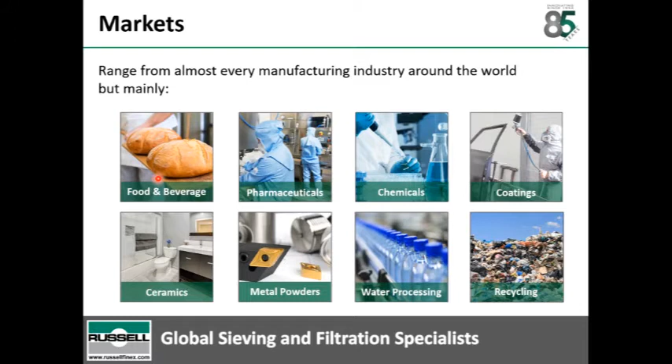We are working with a lot of OEMs, system integrators like GLAD, GIA, and a couple of isolator manufacturers as well.

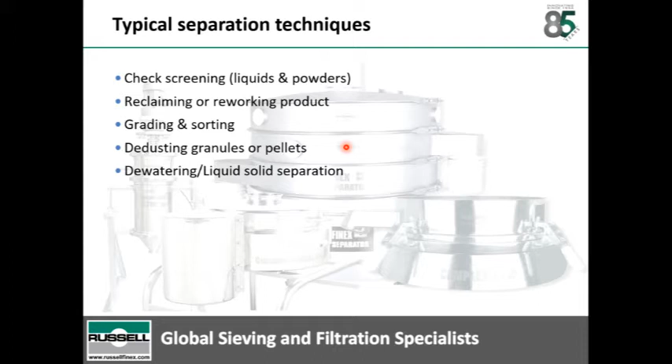Now let's talk about the types of separation technique. Five major types of separation techniques are: check screening of liquid and powder, reclaiming or reworking product, grading and sorting, dedusting granules or pellets, and dewatering or liquid-solid separation.

In continuation to the previous slide, let me take you through different technology or equipment for sieving and filtration. Starting with the bottom one, rotary sifters, which are generally used for high capacity but have low accuracy and poor contamination control. Next is the gyratory separator or tumbler. They are gentle in action and require a large screen area.

Vibratory separators, contrary to gyratory separators, have both horizontal and vertical vibrations and are the most efficient grading machines. Next come check screeners, especially for final sieving. They have minimal contact parts and product dwell time.

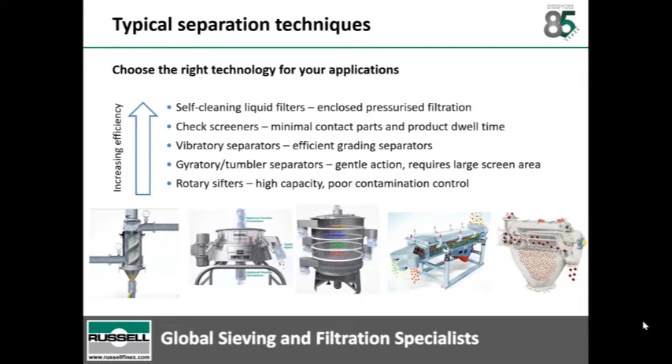Inline liquid filtration: the self-cleaning Russell EcoFilter is an innovative filtration unit ensuring that contamination can be easily removed from your liquid product. Its unique SpiroClean cleaning system and replaceable stainless steel filter element allow for continuous, reliable filtration down to 10 microns. This eliminates the need for production stoppages required to change filter media such as filter bags and cartridges.

Key benefits of the Russell EcoFilter are that they offer totally enclosed filtration, need a small footprint for high productivity, very low or no maintenance, silent operation, and accurate temperature control.

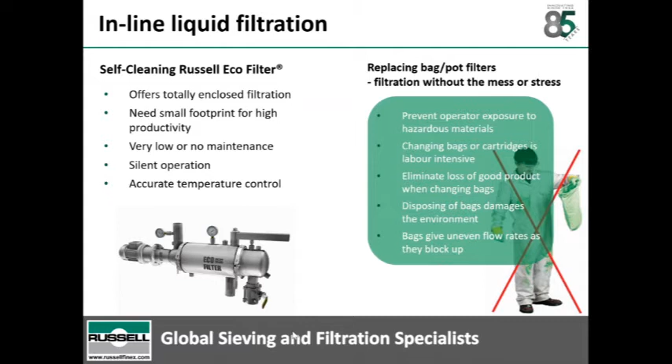Typical applications. There are many places within the manufacturing process where the vibro sifter can add value. It can help you audit incoming material from suppliers, and it helps you meet your product specifications. We have customized solutions for every industry, be it pharma, food, or chemical.

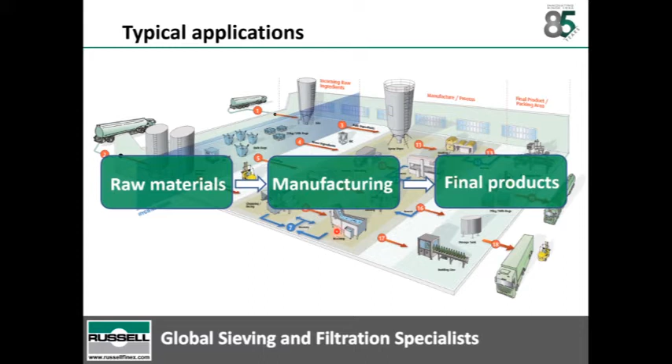Typical applications in the pharmaceutical industry include checking sieving of incoming dry material, checking sizing after blending or granulation or milling, checking sieving of granules prior to tableting, batch check sieving of APIs in isolation booth, and grading final products, that is, top and tailing.

Russell Finex is the only company which has application specific models for each application.

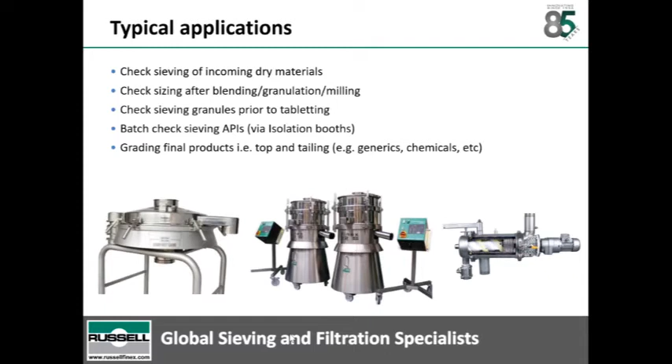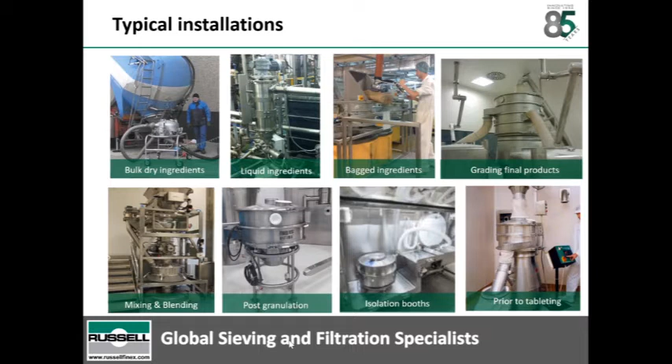While selecting a vibro sifter model, it is always advisable to consider a few parameters, like how the material is going to be fed: is it manual feeding, feeding through rotary valves, pneumatic conveying, or through a screw conveyor? We have a solution for all such typical feeding scenarios.

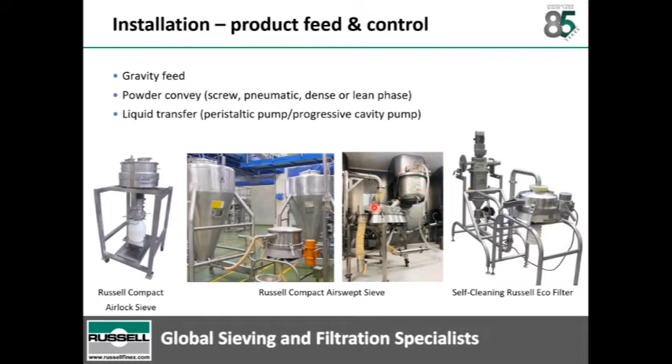In this slide, the first photograph shows a compact airlock with a bottle docking station. The second photograph is of sugar unloading from a bin with the help of a compact Airswept machine. In the third photograph, you can see a high shear mixer being charged through a compact 900 Airswept machine.

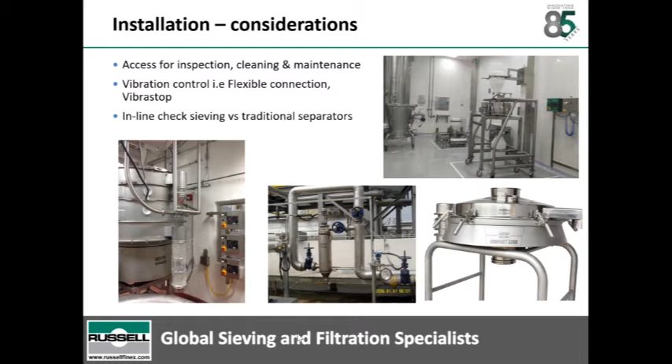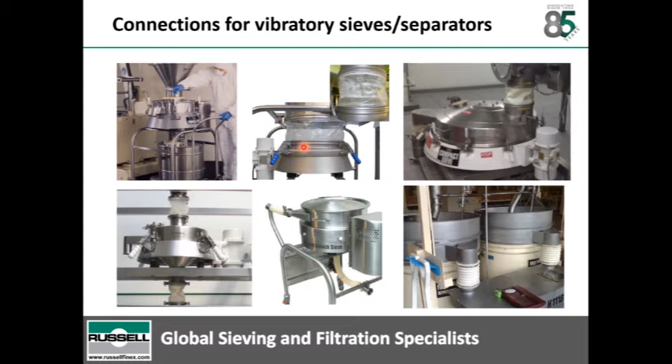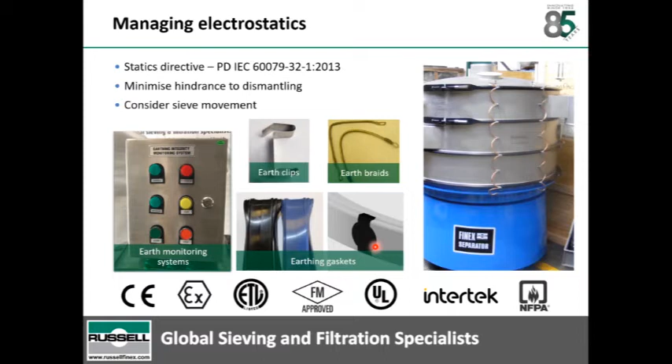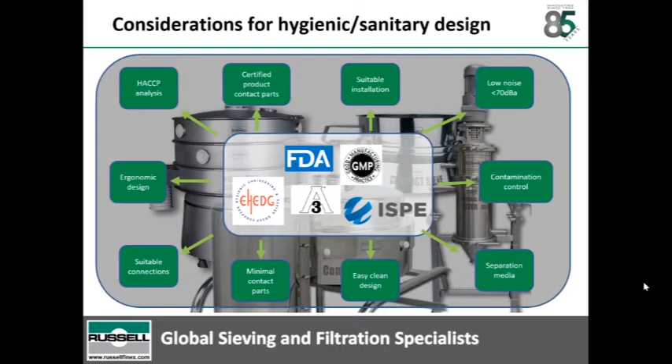Consideration for hygienic or sanitary design.

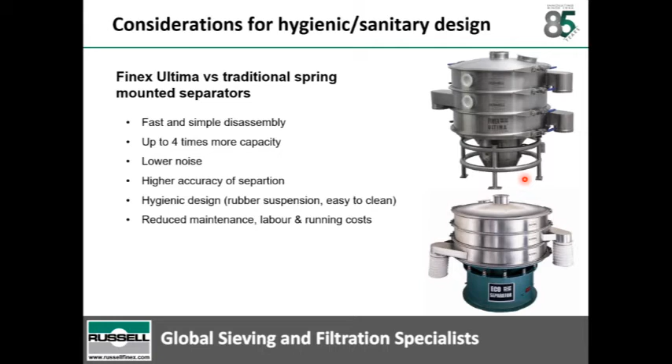Whereas conventional sifters are spring mounted, the Finex Ultima's rubber suspension mounts enable increased accuracy and material control and higher screening capacities compared to spring mounted machines. It also provides improved cleanability due to its modern hygienic open frame design, and we all know hygiene is of utmost importance in pharmaceutical companies.

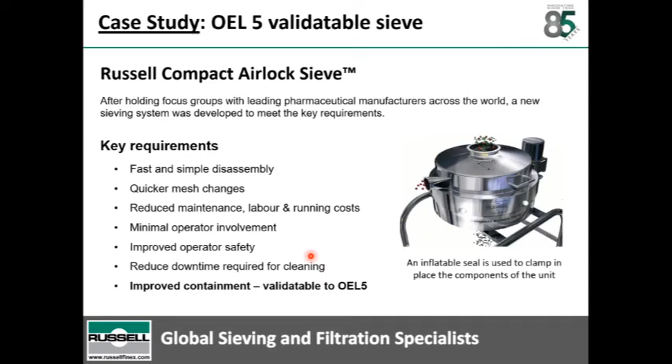Its key features are fast and simple disassembly, quicker mesh changes, reduced maintenance, labor and running cost, minimum operator involvement, improved operator safety, reduced downtime required for cleaning, and improved containment of near about 1 microgram per cubic meter.

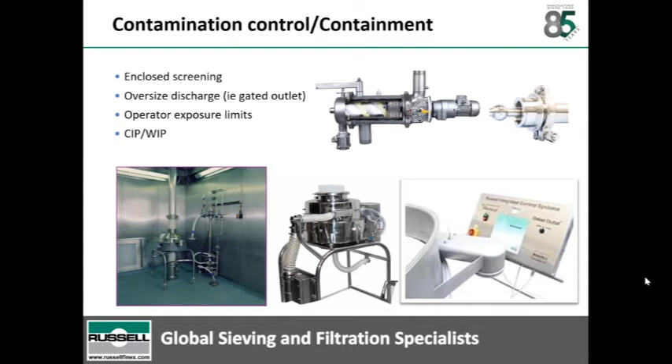Case study: API isolation booth with aseptic pneumatic sieve. In this slide, you can see the application in which APIs would be loaded into the isolator and vacuum conveyed and screened by another integrated sieve system.

Key benefits are suitable for ultra high containment area, maximum operator safety, easy to clean, very low noise, OEL level 5 containment, and very small footprint.

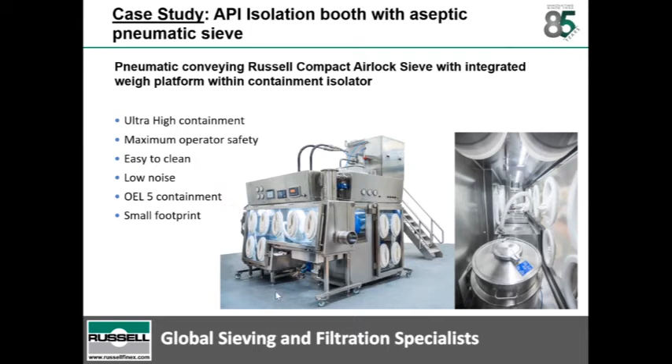In continuation to the previous topic, here are a few more photographs wherein we have installed sifters inside isolators. You can see in this photograph a mini sifter is installed in an isolator.

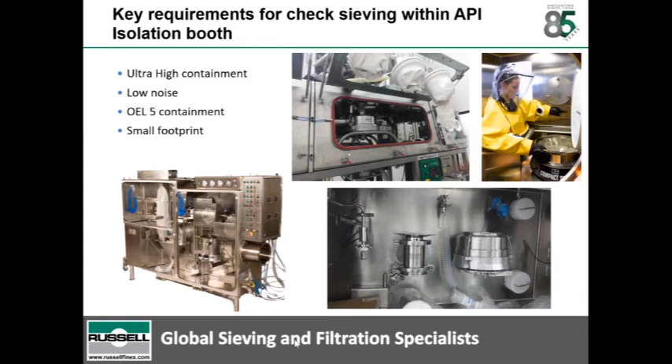Removing ferrous contamination. Another important solution that we provide for ferrous contamination that happens in food and pharmaceutical industry is a fully stainless steel easy clean separator. Unlike conventional magnetic separators where the magnet bars are secured at both ends, the easy clean magnetic separator has a unique open-ended design, allowing for ferrous contamination to be removed easily and effectively.

Russell Finex easy clean magnets are designed to allow optimum coverage of magnetic field strength. You can see in the picture, there are 4 magnetic bars which are placed in such a way that you get maximum coverage in the magnetic field.

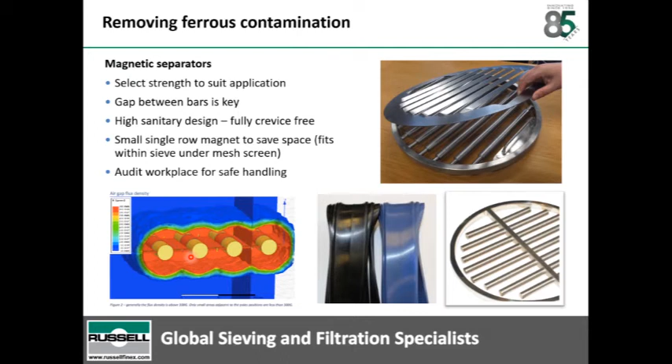Filtration media selection. In case of vibratory sieve, we provide mesh frames with a mesh count as well as in micron. Generally, we prefer to supply mesh frames in micron as they are more accurate. We have the options of different MOCs like SS304, 316, 318 and 430.

In case of liquid filters, we have 2 options for filter screen. The first one is defined hole, which has high accuracy but low open area. The next one is wedge wire, which has low accuracy but high open area.

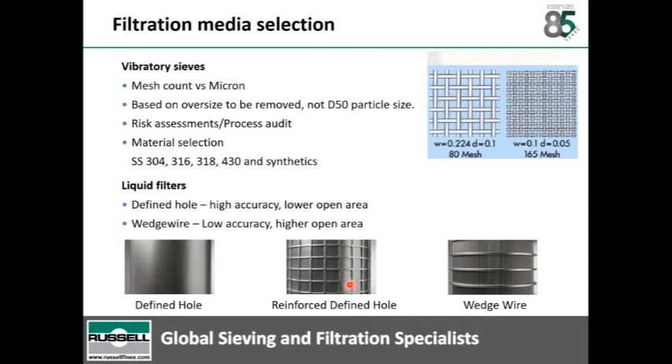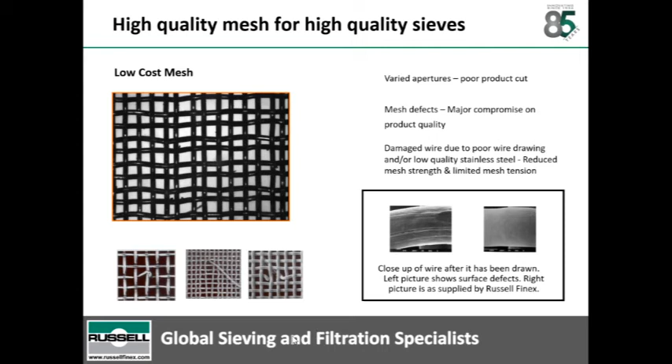Now you might want to ask how we ensure high quality mesh, the most critical part of our machine. At Russell, all mesh cloths are sourced from the top quality manufacturer in Europe.

As you can see on the screen, there are a lot of defects in the low cost mesh which can reduce your product quality. On the right hand side box, you can see the close-up picture of the surface defect found on local wire mesh, whereas Russell mesh have no such defects.

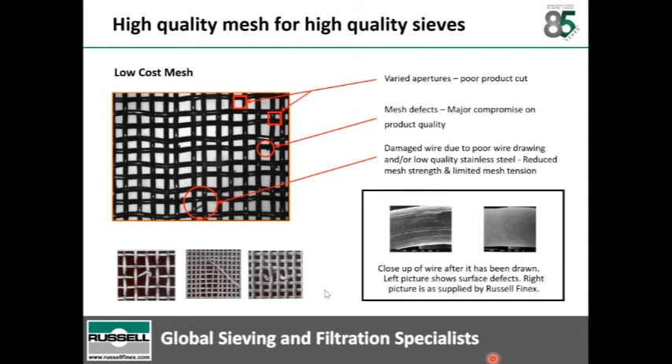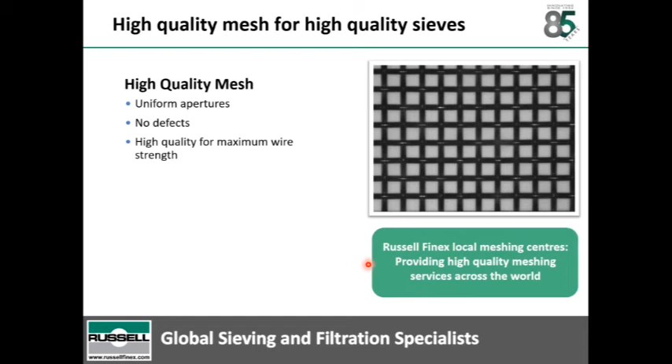Continuing on the same topic, Russell mesh frames are with uniform aperture with no defects. With Russell mesh frames, you will have high sieving accuracy, improved mesh life, and reduction in frequency of remeshing.

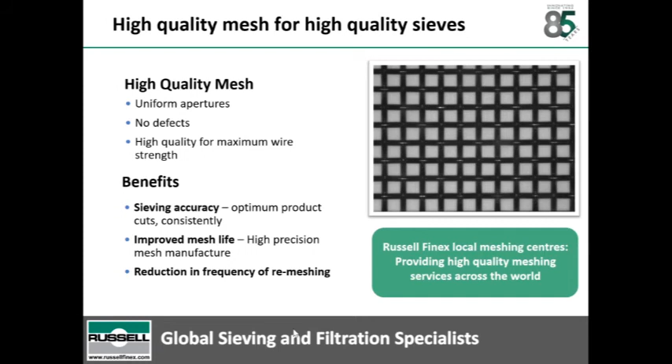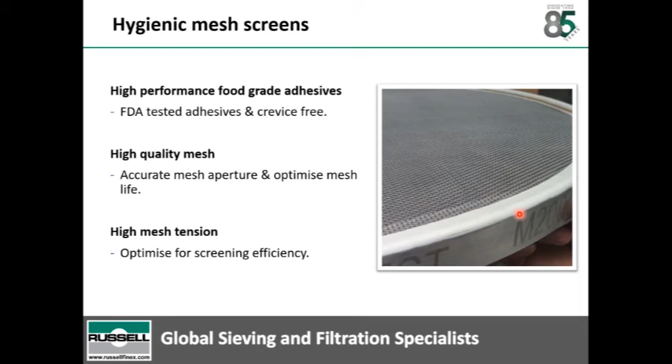Ultrasonic mesh deblinding. As I said earlier in the introduction, Russell Finex is the only company which supplies its own ultrasonic system with in-house knowledge for support and best integration into the sieve system. Ultrasonic screens help in preventing blinding and blocking of mesh when difficult and sticky powders are screened.

The patented vibrasonic deblinding system, also known as VDS, consists of a generator and a probe. An ultrasonic frequency is applied directly to the mesh screen, making the mesh wire friction-free and avoiding blocking of the mesh frame.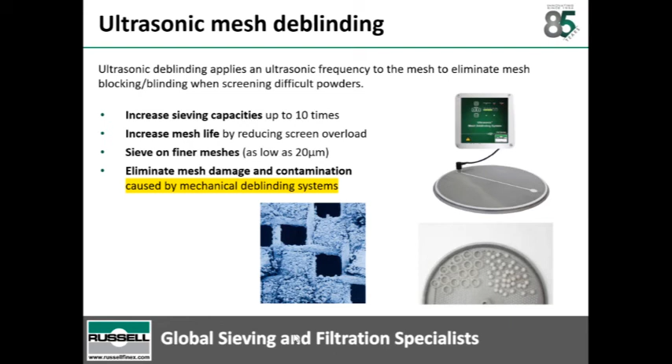Major benefits of vibrasonic deblinding systems are increased sieving capacity, increased mesh life, ability to sieve on finer mesh, elimination of mesh damage and contamination. In the next slide, I will show you the demonstration of the ultrasonic deblinding system.

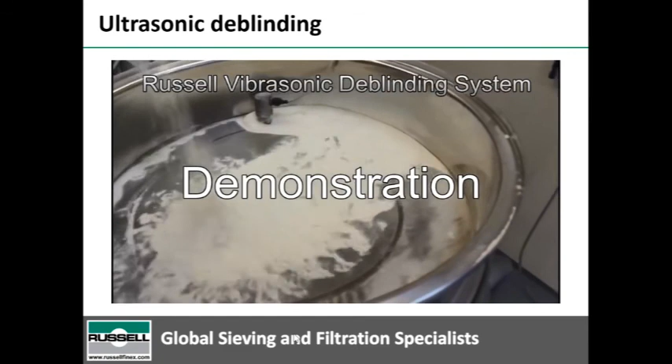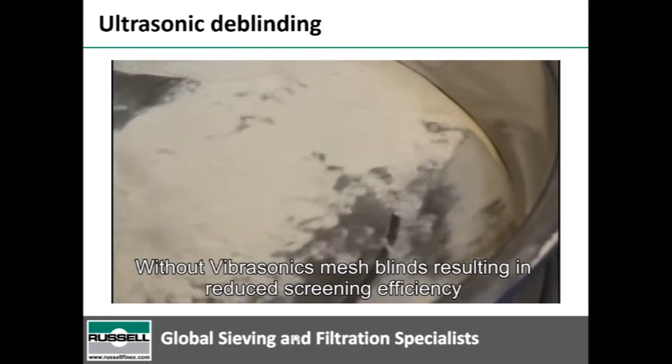Without vibrasonic, mesh blinds result in a reduced screening efficiency. On the screen, you can see these white spots. These white spots are the blockage in the screen. Once we start the ultrasonic system, the entire mesh gets cleaned.

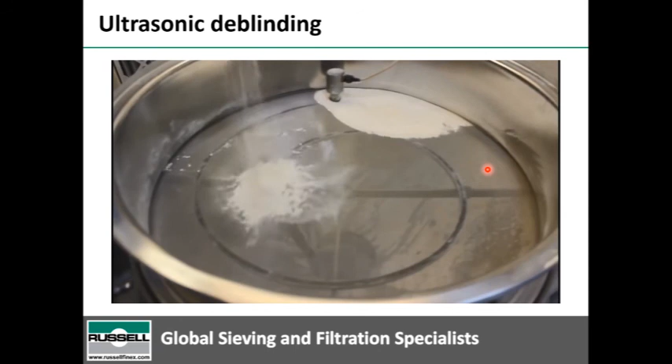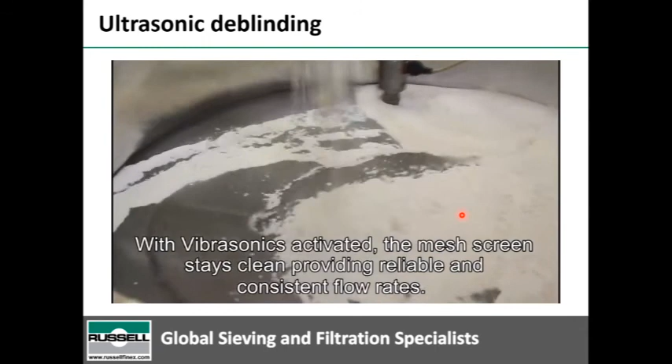So with the activated vibrasonics, you get consistent and reliable throughput.